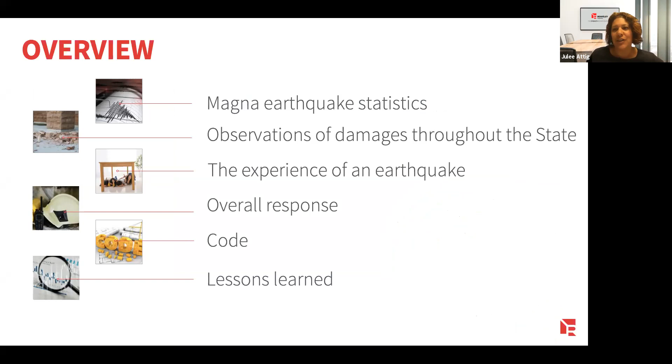My name is Julee Attig. I'm Director of Marketing at Reaveley. Today what we'll be doing is giving an overview of Magna's earthquake, as well as share photos and memories of the damage we observed that day. The photos will then shape a discussion around the code provisions intended to prevent the damage, as well as code performance. The team will also give a brief overview of ATC 20 and the need for training, certification, and coordination within our AEC community. I'm joined by 4 of my coworkers: Dorian Adams, Jessica Chappell, Jerod Johnson, and Mark Harris.

So while it's been 3 years since we felt that morning earthquake, there are moments that still stand out so clearly for me. The concrete pendant light swinging over my kitchen counter, the coffee spilling out of my mug and onto the table. The shaking seemed to go on forever, and then it finally stopped, and all was quiet. That quickly changed. Texts began flying as friends and family checked in on one another. My power came back on.

Shortly after the 4.6 magnitude aftershock, I got a phone call from our receptionist. She was telling me of all the calls she was getting for building inspections. I texted our firm president, Dorian, asking if I could go into the office and help, and he said yes. I was too afraid to get in the shower, so I simply grabbed my dog and drove to the office. My 5-minute commute seemed surreal, and all I kept wondering was how this day would unfold.

At the office, I went to our command center leader, Robert Godfrey, to get instructions on how to field calls. A live Excel spreadsheet had been created to log the calls, and Robert pointed out the key questions I needed to ask so the inspections could be prioritized. After that, I sat at my desk and began answering the phone. I could hear the emotion in the voices of the callers—uncertainty, anxiety, and maybe even a little fear.

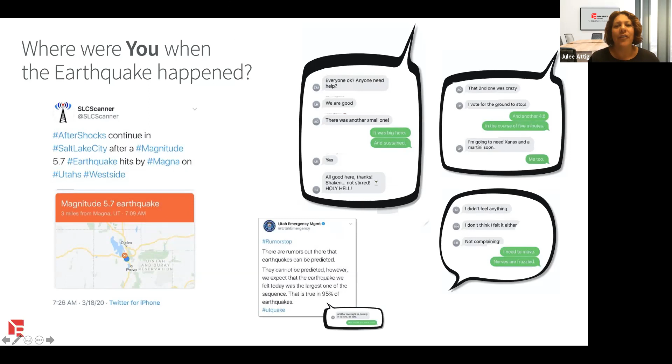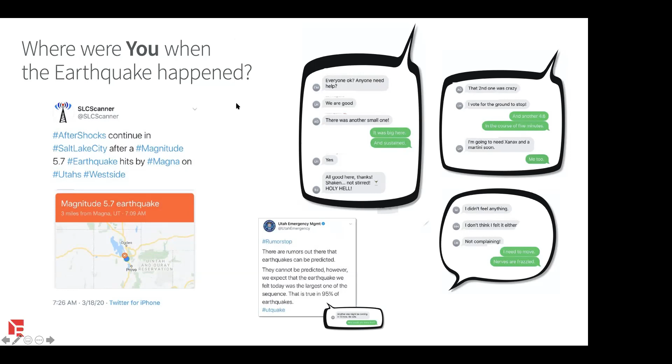Well, Julie, thank you. I had a parallel experience. I was getting ready for work that morning, and I literally had one shoe on and was getting ready to put the other on when the event struck.

I felt the rattling of my home and immediately ran down the hall. My wife had come out of the bedroom and was ready to scold me for having shaken the bed, and I let her know it was an earthquake. I checked on the kids and was a little disappointed that my teenager had slept right through it, not even realizing it.

So we had a 5.7. That has become part of our regular dialogue now. A lot of us understand this term and use it frequently. But what does it really mean when we say we had a 5.7 in Magna?

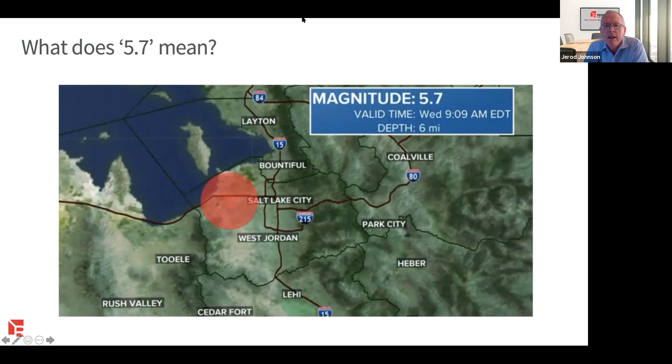My own experience—I don't have a wealth of experience sitting through earthquakes, but it felt moderate to me, so about a 5. That seems to be consistent with the experiences of a lot of people throughout the area. So that's a very subjective measure—what did we experience?

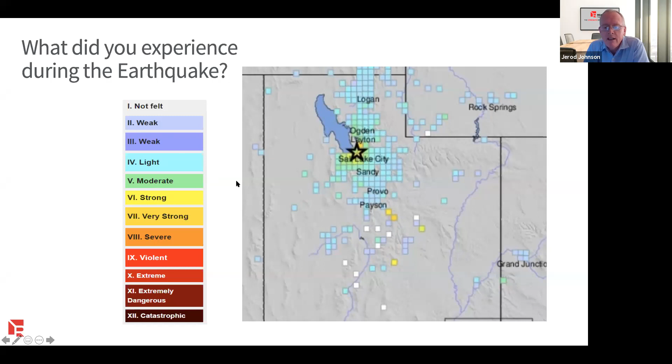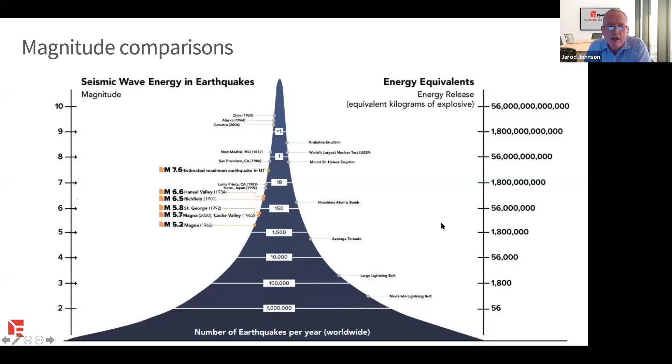The energy equivalent, however, if we look at the scale on the right-hand side, represents a 32-fold increase in the amount of energy released. So we can look at this curve and other earthquakes and events and see the relative comparisons.

For each one of these sites, we can take the acceleration records and analytically, using our numbers as engineers, look at those recordings and see that intensity and what it actually means in terms of shaking of the surface of the earth and shaking of buildings that are, of course, connected to the earth. One of the tools we use is the response spectrum.

What we can do is take any earthquake record and develop a response spectrum. This gives us a measure of how structures in general respond to that acceleration record.

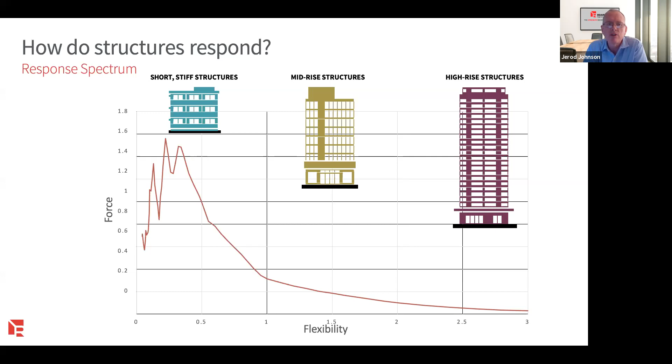Now as we look at a couple of other spectra at two different sites, on the left we have the Lee Kay Center site right out near the epicenter, with the blue line representing the spectrum developed from that station and what it recorded. On that same chart, the green line represents what the code would prescribe at that particular site. On the right, we look at Brigham Young Park downtown, and we see the green line far above the blue line, showing that the Magna earthquake represented only about 1/5 of the design forces we would typically look at for the downtown area.

So the takeaway from this chart, particularly with the Magna quake, is that we cannot really accurately predict the intensity of shaking. As designers, we're far better served to look at how we design and detail structures to respond to earthquake shaking, rather than trying to precisely predict the intensity and nature of shaking that's going to occur.

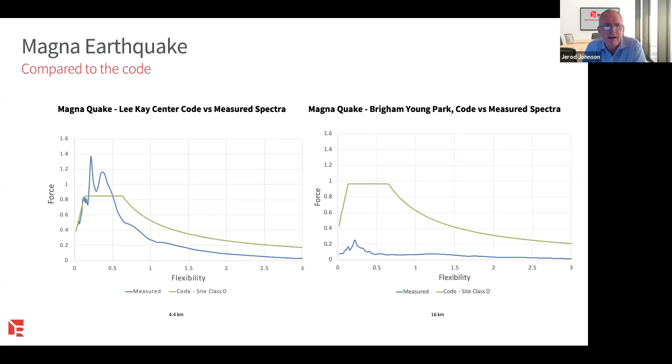So we had a lot of experiences that day, a lot of opportunities to go out and look at structures. Dorian, show us some of the observations that we made.

Yeah, thanks Jerod. So that morning I was getting ready for work and felt the shaking, walked around the house. Didn't seem like a very large event to me, so I just went about my same routine. And then my phone rang. I got a call, and then another call, from building owners wanting us to go take a look at their buildings and assess the damage.

I realized quite soon that this was going to be an urgent matter, that there would be many owners and buildings that we'd be asked to go and assess.

One thing we noticed is it didn't take very much damage for buildings to be shut down. In some cases, no damage at all. Building owners were just not comfortable having their employees go back into work without an assessment being done, and that was the case for the city and the county.

The city and county do have their own assessors and inspectors, and could have done their own assessments on their own buildings, but their inspectors were busy in Magna looking at the most severe damage. So the city and county reached out to the design community to help them.

We also saw that job sites were shut down. There were many job sites where the superintendents and project managers were just not comfortable having their employees go back in to work until an assessment had been done. The takeaway is that this relatively moderate to small event caused a huge amount of disruption, and when a larger earthquake comes, it will be even that much more significant.

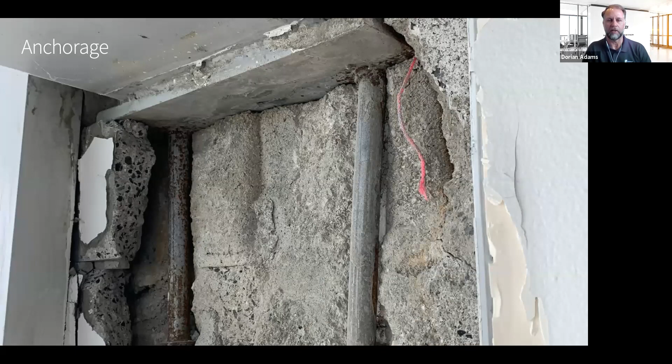Now I'd like to show you a little more of the damage that we actually saw. A really important part of building structures is the connection between walls and roofs. Here you have an embed plate that's popped out the face of a masonry wall, and that connection has basically failed—there's not much strength left.

On the other hand, the next photograph shows a similar kind of connection with an embed plate and headed stud anchors that are anchored into the wall with some reinforcement. There's a little piece of rebar there holding it in, and there's still some residual strength in that connection, even though the concrete has spalled out.

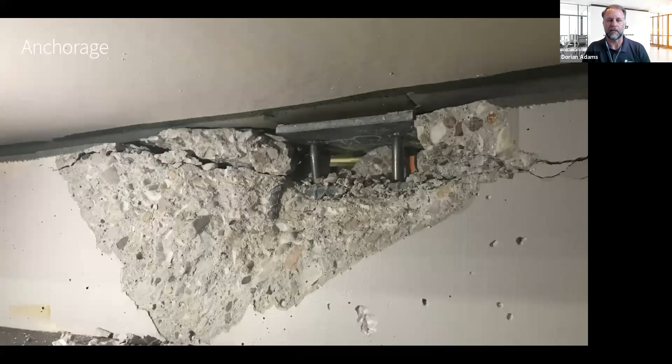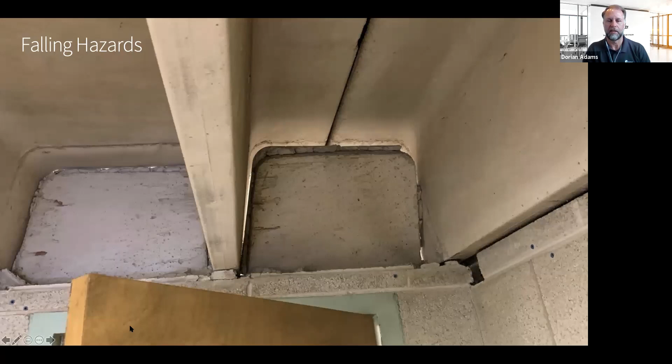We also want to pay attention to falling hazards. Anything that's heavy and high up in a building should be anchored in. This is a piece of concrete that's a cap between precast double T's, and it's leaning over, about ready to fall. The next photo shows the same thing, however it had fallen. So this is an example to make sure heavy items are braced and anchored properly so they don't hurt anybody if they fall over.

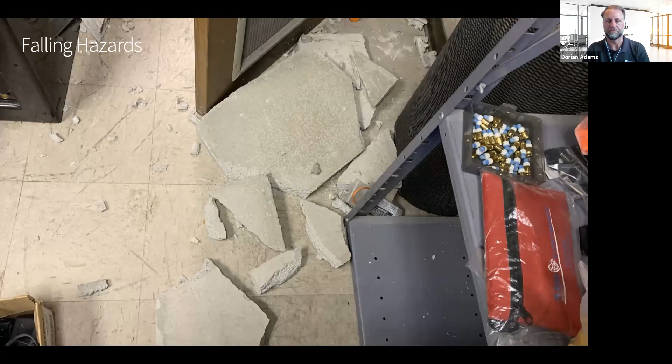Another provision regarding ceiling construction is that the perimeter edge angle around rooms is required to be 2 inches wide. That way, when movement occurs, there's enough length of that angle that it doesn't allow the ceiling grid and T-bar to fall off. In this location, the edge angle was only about 1 inch, and that whole section of ceiling fell in.

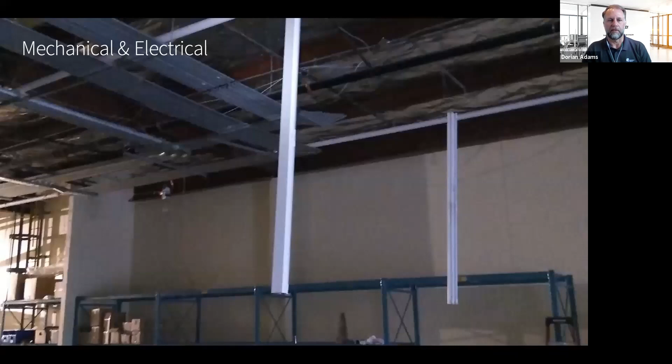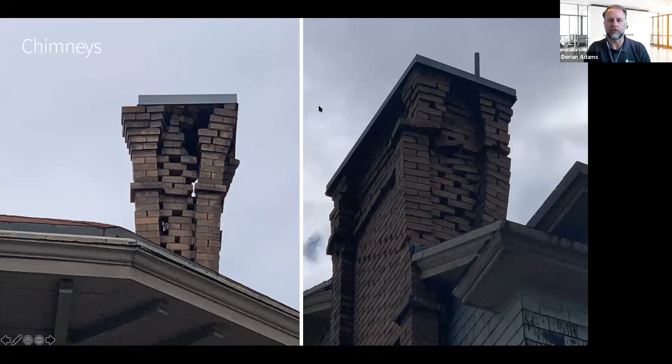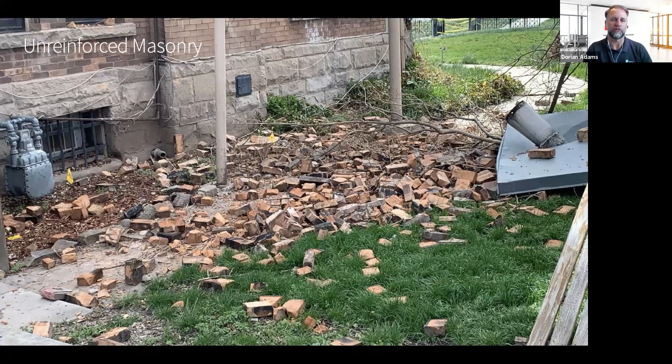Chimneys are also very susceptible to earthquakes. You can see how these 2 separate chimneys are basically on the verge of collapse right now. The next photograph shows where one of the other chimneys on that same building had actually collapsed - all the bricks were scattered all over the ground, and you can see the steel chimney cap just laying there. Luckily, no one was there and nobody was injured.

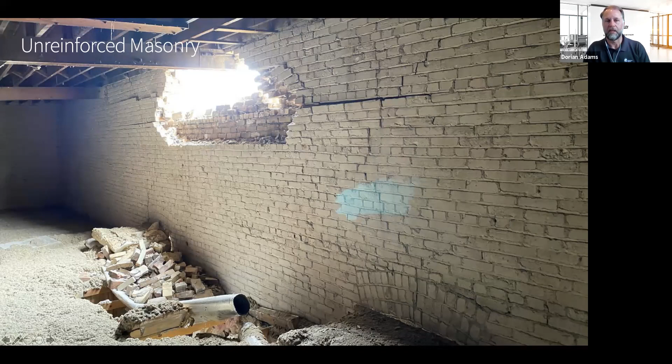This next photograph shows how roof to wall connections are so important. The connection between this roof structure and the wall had failed and allowed that roof or ceiling structure to collapse. We want to make sure there are strong connections between roofs and walls.

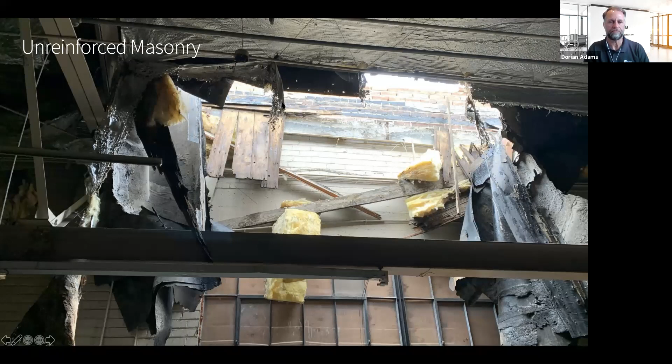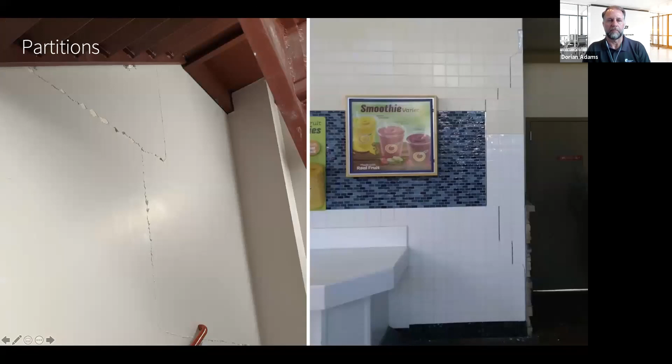Then partitions - interior partitions. We think about gypboard partitions as a non-structural element. The way to minimize damage of non-structural partitions is to make sure there's a separation or movement joint between the top of the partition and the underside of the floor or roof structure above. Usually that can be done with a deep leg track or some other sliding mechanism that allows the roof or floor above to move differently than the wall below, isolating the partition from the structure.

So that's the end of the photographs that I was going to share. Julie, I'm wondering, do we have any questions that we could answer at this time?

We do. I'll start with a question that Fred Cox submitted. He said, how come the quakes don't follow known fault lines in Magna?

I think I'm going to defer that one to Jared. What do you think, Jared? Well, we're still in a state of learning about this earthquake, and I've made comments before that it's probably going to be quite a while before we really understand all of the nuts and bolts and the fault mechanisms and everything that happened with respect to this event. We do have tracings of the Wasatch Fault and other subfaults that go throughout the valley. This one, though not entirely understood, we are gradually beginning to learn more and more about it and how it correlates to the other faults and mechanisms that we do know with respect to the Wasatch Fault.

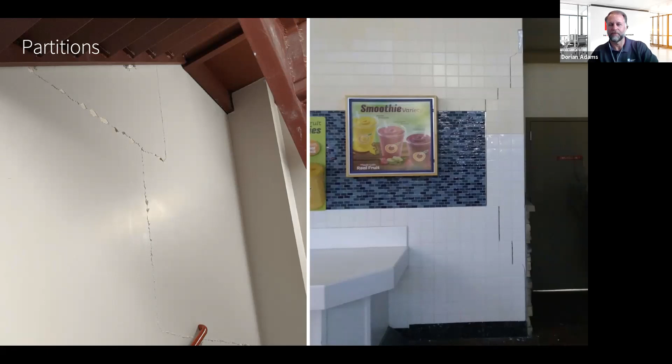You want to take that, Jerod? I think—sure, I'll take that.

We deal with unreinforced masonry structures quite frequently. We have a huge inventory, somewhere between 140 and 180,000 unreinforced masonry buildings up and down the Wasatch Front. We're fortunate to have modern codes for evaluation and retrofit of existing buildings, and chief among those is the ASCE 41 standard that helps us evaluate unreinforced masonry and give credit where credit is due.

Unfortunately, unreinforced masonry rarely can be demonstrated within our numerical models to have enough strength. So quite often we're looking at reinforcing it by either putting a layer of reinforced concrete on it, or sometimes even with light gauge metal or regular red iron to brace the unreinforced masonry structures.

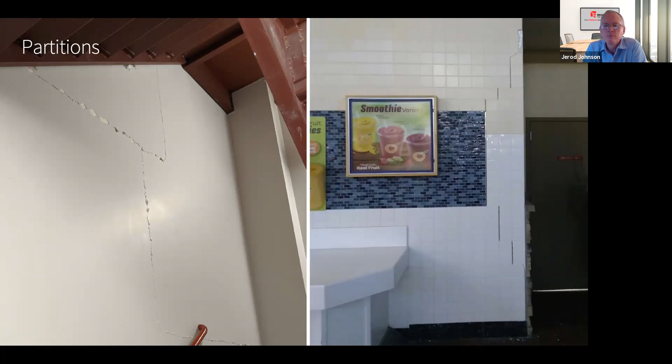Thank you. And I'd add that composites are used sometimes as well.

Stephen has a question, and I believe Jessica is going to be addressing that in regard to the city and the county reaching out to our design community for assistance. Jessica, you'll be touching on that, right? I will.

So at the same time, the folks in our office were busy bustling around the valley, assessing buildings. EERI, the Earthquake Engineering Research Institute, began their virtual earthquake reconnaissance efforts. EERI is a multidisciplinary national organization with a local chapter. Reaveley's actively participated in national conferences and local workshops and have participated in leadership—Craig Wilkinson is currently serving as chapter president, and Jerod is a former board member.

EERI has a long history of boots-on-the-ground earthquake reconnaissance for major earthquakes. In recent years, in the digital age, they've developed a procedure for virtual reconnaissance based on information publicly available in the 48 hours following the event. Through this process, they generated a report summarizing the characteristics of the Magna event. The VERT team uses a Slack channel to quickly gather public reports, newspaper and news articles, and I'm going to recap some of the high points of that report.

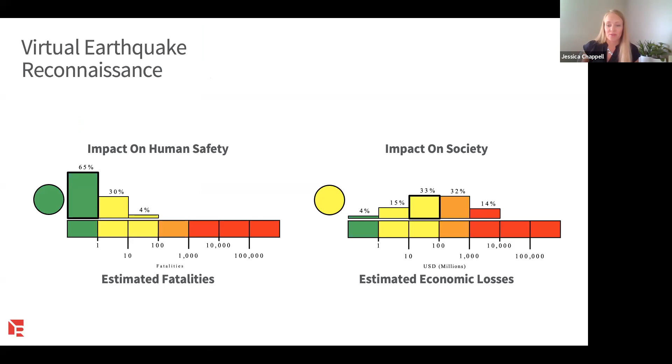These first two figures are diagrams generated on the USGS website almost immediately following our event. Based on the size and characteristics of our community, USGS estimated 0 to 1 casualties—including fatalities and major injuries—as well as economic losses between $10 and $100 million. Both have proved to be accurate based on the information we have now, three months later.

Some impacts to the community: everybody knows hospitals and schools form cornerstones of our community. Hospitals largely remained operational, with no loss of functionality. The University of Utah opened an emergency command center per their emergency plan, and some clinics were closed for building inspection—some of the older ones. But ultimately there was not a significant reduction in operations.

One interesting thing about this earthquake occurring within the coronavirus pandemic: the coronavirus hotline in the state was down due to an evacuation of the building. Additionally, the state testing lab processing the COVID-19 tests was also down, but was able to resume operation within 24 hours.

With our schools, as we all know, schools had been closed due to the pandemic, so students were not in session. But all of the schools in the Salt Lake Valley were closed to all staff, pending evaluations by engineers. There was significant damage at Silvercrest Elementary School, Westlake Junior High, and Cypress High. Additionally, the Browning building was closed to wait for an inspection.

Moving forward with housing impacts: most of the impacts to housing was in the modular home communities near the earthquake. There were 49 homes marked as uninhabitable or restricted access due to foundation failures. Additionally, chimney damage was widely reported in unreinforced masonry homes and apartment buildings in both Magna and Salt Lake City. In the early stages after the earthquake, the Red Cross opened evacuation centers at Valley Junior High School and Taylorsville High, but most residents were able to relocate with family, so those weren't needed for an extended period of time.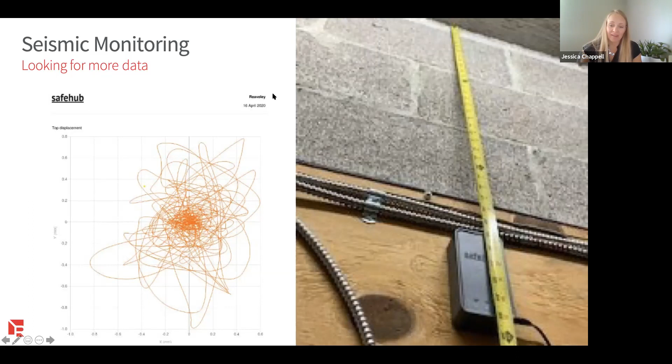So what you're seeing on the screen is a graph of the lateral movement of our building, essentially moving north, south, east, and west. We're seeing what amounts to 2 millimeters of total movement. Everybody seemed surprised that it was only 2 millimeters for those folks who were in the office. Ultimately, I think it's just a really unsettling phenomenon to have the ground move under your feet.

This is a graph generated by the seismograph stations up at the U, and they are reporting as of June 10th, 2,289 aftershocks. Thankfully, most of them have not been felt by the community.

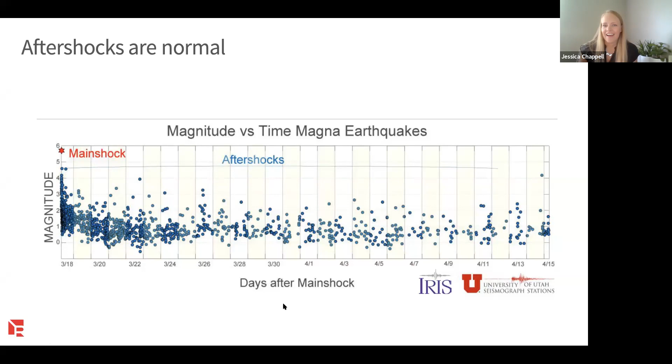So this next little clip is a really interesting video. Our earthquake was essentially a small one, right? It's moderate, and it's our first significant earthquake. But you can see that this video is actually showing the waves from our earthquake hitting the seismograph stations all across the North American continent. It's pretty impressive that we have that kind of information available.

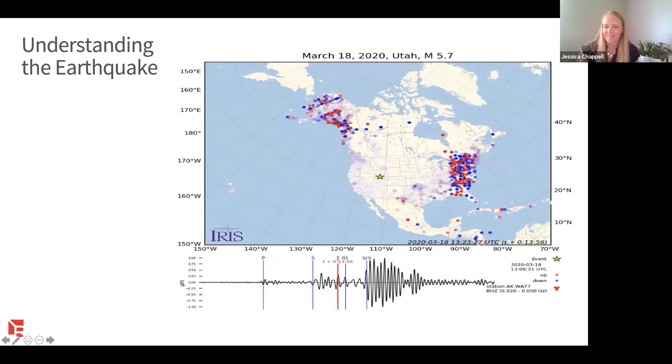This next map is similar to the one that Jared showed, and it's meant to capture shaking intensity, using the same scale, the MMI scale. You'll notice we've got a star where the epicenter of the earthquake is. That first circle shows where the shaking was felt the strongest, and as we move out, those rings indicate a slight reduction in shaking as we move away from the epicenter. You'll notice these rings are not concentric circles.

You can see that the intensity correlates with the mountain ranges. So you might have had a family member or friend in Sandy who felt shaking more intense than you did on the East Bench in Salt Lake City, and that's due to the geologic formations under your feet at the time of the earthquake.

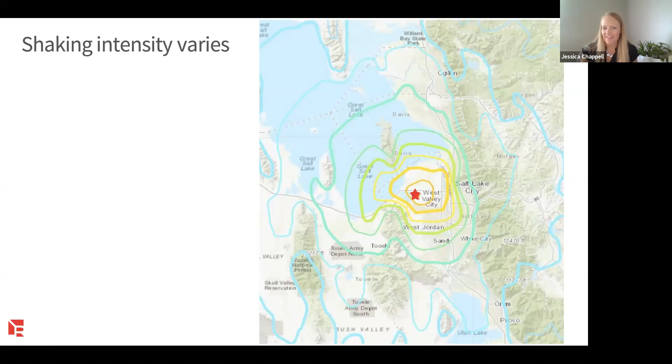Now, ATC 20 is one that everybody is really excited about. Steve had a question about the program. In Utah, the Utah Structural Assessment Program is a sub-committee of the Utah Seismic Safety Commission, and right now it is chaired by Jim McClintock of Sandy City. We have a formally established ATC 20 standard for building assessments.

Under USAP and emergency managers, building placarding carries the weight of the building official or the authority having jurisdiction. This is different than a privately arranged building assessment, which are professional opinions. For the Magna earthquake, all of the tagging of the buildings was done entirely by city and county employees.

There were two reasons for this. One was, given a small earthquake with moderate damage, there's less need for inspectors, less risk of collapse for these other buildings. The other touches on the pandemic and its effects — that was one more factor as building emergency managers were making these decisions. They didn't want to bring in any extra personnel, since they were already facing challenges with social distancing and keeping all of their staff safe.

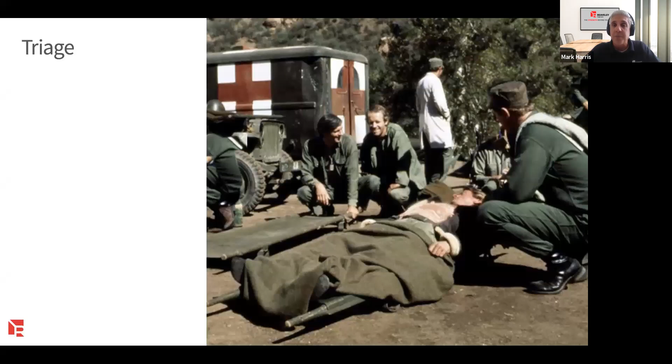In the days following the Magna earthquake, we had a great demand to evaluate the condition and safety of a lot of buildings. We were able to quickly prioritize those facilities with a major community impact, evaluate them, and still review many other buildings needing review in a timely manner. In the event of this large quake, in addition to those major buildings, there will be hundreds, if not thousands, of buildings that have to get some kind of prioritization process. So the need to have a more rigorous system and criterion for prioritizing that process is something we definitely need to investigate and generate as we move forward.

The other thing we talked about was ATC 20 training. In the days after this event, that was a major topic. It's been a major topic of Jessica's and Jared's as we've gone through this presentation today. In the aftermath, we realized that not 100% of our staff had this training, and we developed a goal that over the next year we would get all of our engineering staff trained and ready to go on this.

But the other part of ATC 20 training is, even though a significant portion of our staff had already received it, it had been some time since doing so, and there was a certain amount of rust in the cobwebs there. We realized we needed to hold regular refresher seminars so that we're up to date on the requirements and procedures, because we don't know when the next earthquake's going to come, but we're sure that when it does, we won't have time to hold a refresher seminar so everybody knows just what they need to do at this level of training.

So with that, we'll turn it over to some questions. Thank you.

All right, we have a couple of questions. I see one about the Fix the Bricks program. Jessica, could you help us with that? Is it limited to Salt Lake City limits? Yes, right now that is a Salt Lake City program, and there is some discussion about trying to expand that program beyond those limits, but ultimately it's Salt Lake City limits at this time.